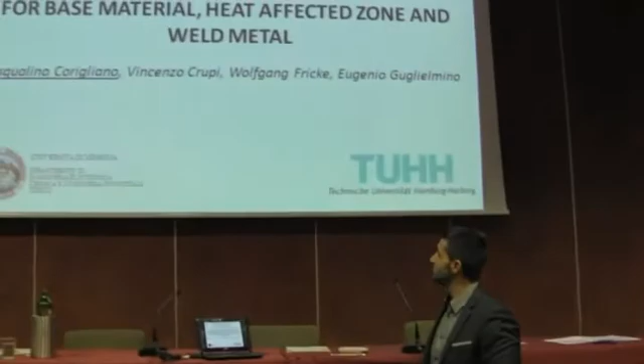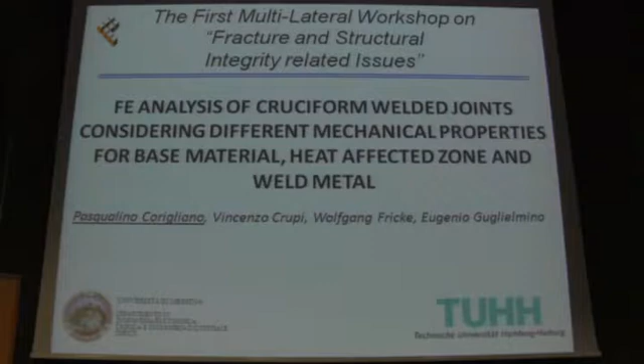The work I'm going to present today deals with the finite element analysis of cruciform welded joints, made by considering different mechanical properties of the base material, heat affected zone, and weld metal.

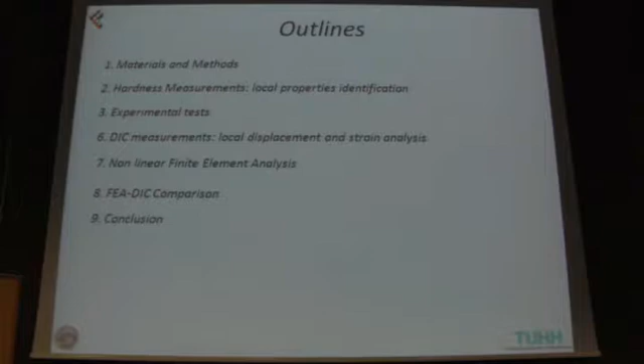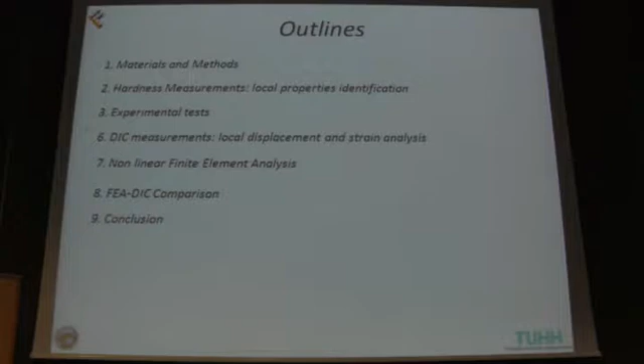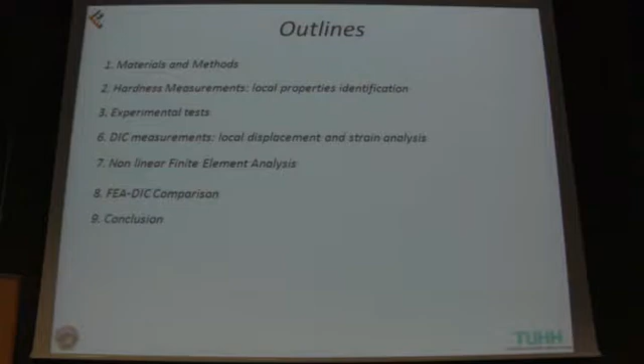The outline of the work is as follows. First, materials and methods. Then hardness measurements performed to identify the local properties related to stress-strain curves for the different material zones. Then the experimental tests using the DIC technique to detect local strain and displacements. Then a nonlinear finite element analysis, compared to the experimental test, and at the end the conclusions.

The material used is a mild steel, widely used in the naval field, and the welding technique was a full penetration welding using the MAG process. In these figures we see the real welded joint and the nominal geometry of the welded joint used for the experimental test.

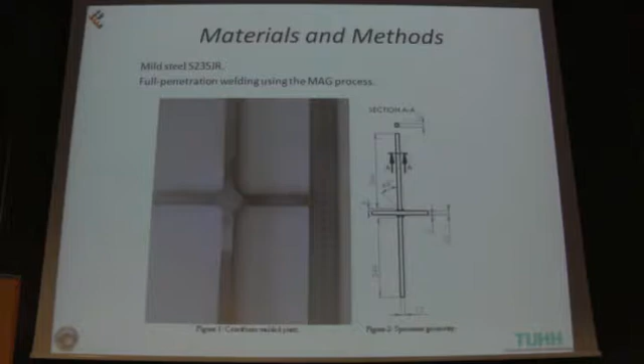The hardness measurements were performed with an innovative method called the UCI method, based on the natural resonant frequency of a bar, which is excited and pushes the Vickers diamond into the sample. This frequency changes, and these changes are related to the hardness values of the sample.

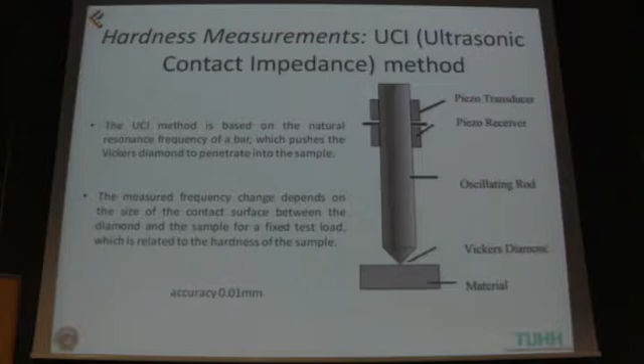The accuracy of the instrumentation is about 0.01 millimeter, and we are able to have a whole map of the hardness measurements. Here we see the test.

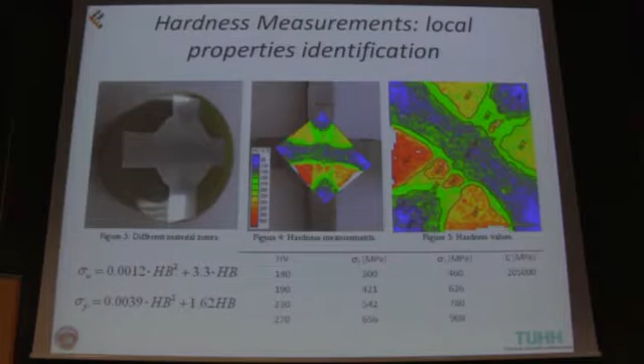Using these groups, we related the hardness values to the ultimate and yielding stress of the material. These two equations were taken from literature, from a recent paper of Lopez and Fatemi. Using these equations, we defined the different material characteristics that we are going to use.

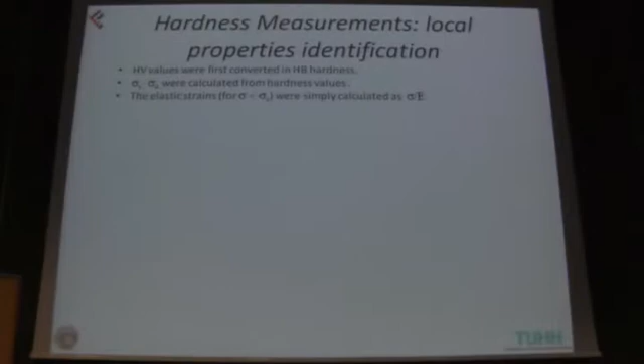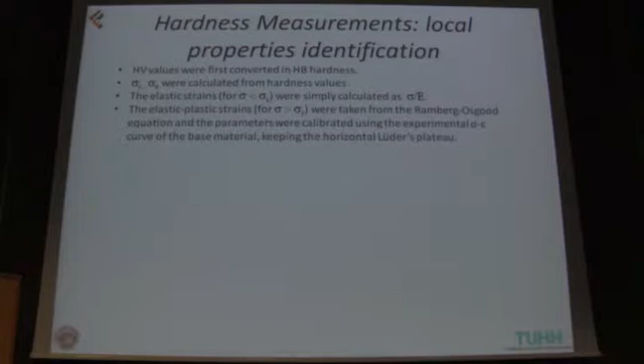Resuming: first we define the different groups of hardness values. Then HV values were converted, and the stress-strain curve was evaluated. The elastic strain was calculated as the sigma over E ratio, while the plastic part was calculated using the Ramberg-Osgood equation. The Luder's plateau band was also kept, and the base material curve was validated with the hardness measurements.

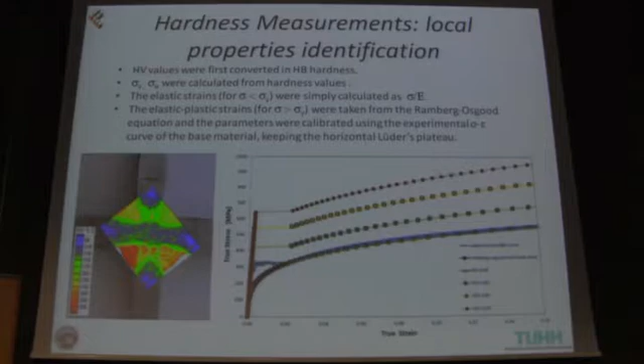In this figure we see the input parameters; this test is a displacement control test, and this is the force revealed by the load cell from the machine. Here we see the deformed specimen at the minimum load.

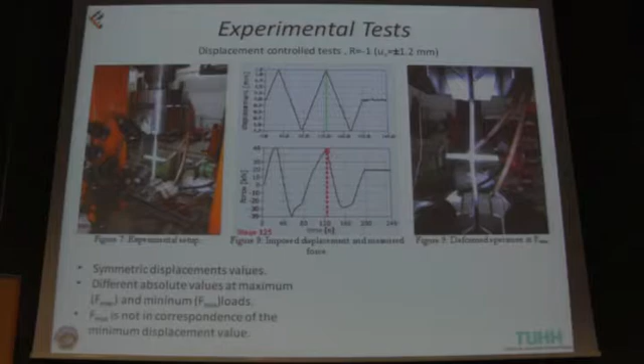It's possible to observe that symmetric displacement values arise, but at the same time we observe different values of maximum and minimum load. Moreover, the minimum load is not in correspondence of the minimum displacement. This means the specimen deforms in a way that bending arises, causing a diminution of the load.

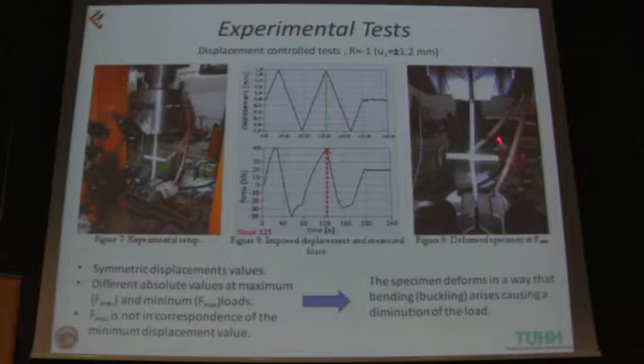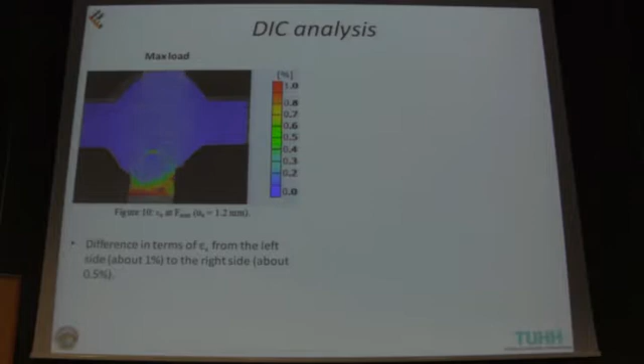It's also possible to see from these figures at the minimum load. The DIC analysis performed analyzed max load and min load. At the maximum load it was observed that there is a difference in terms of strain along the X direction, the vertical direction, from one side to another.

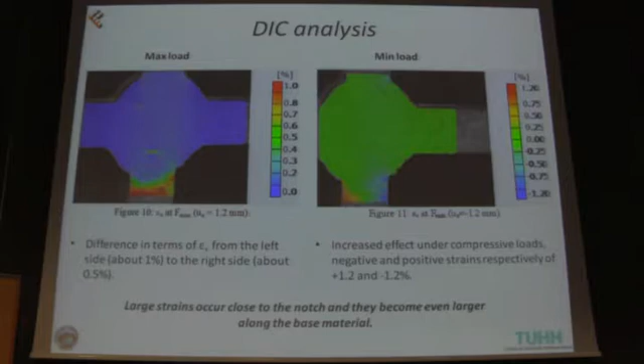At the minimum load this effect is even increased. We can see that negative and positive strains are present. Also, during these measurements it was observed that large strain occurs close to the notch, but they become even larger along the base material.

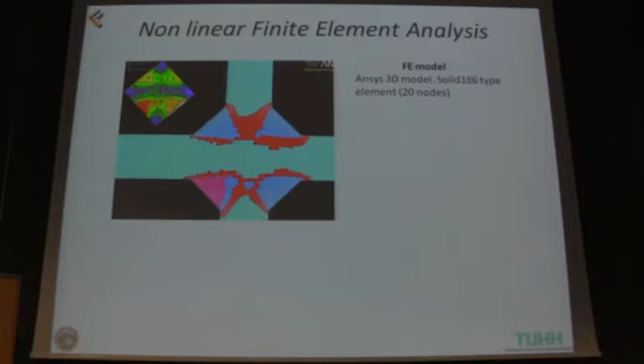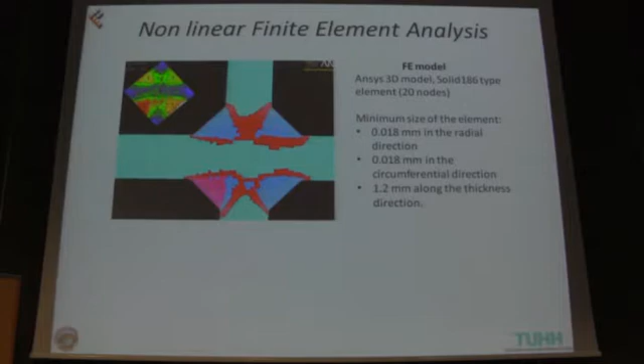After this test, we performed a nonlinear finite element analysis using ANSYS software, developing a 3D model which uses the solid 186 type element with 20 nodes. This is the minimum size of the element at the notch of the specimen. The nominal notch radius is 1.2 millimeter.

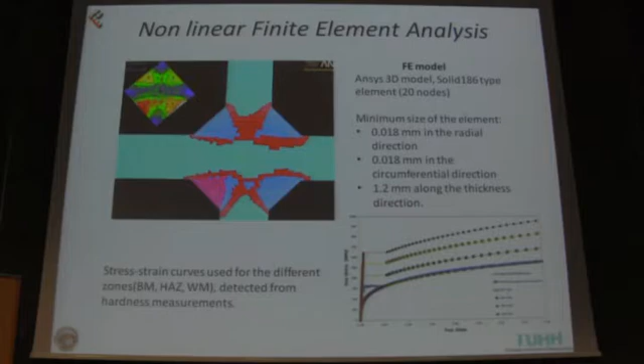The stress-strain curves used were the ones defined before from the hardness measurements discussed previously. A preliminary analysis was performed.

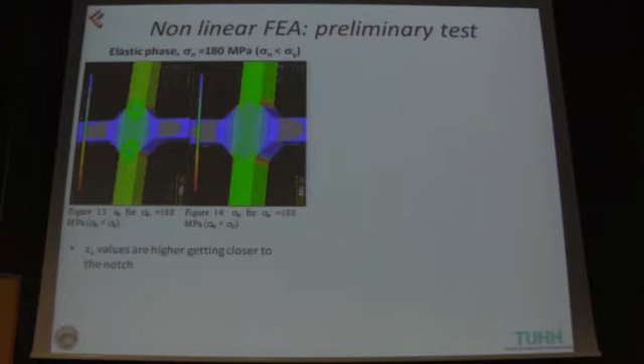First, in the elastic phase, it was observed that the strain in the vertical direction is higher close to the notch. While in the elastic-plastic phase, for a nominal stress greater than the yielding stress, the strain in the X direction evaluated at the notch is higher than in the elastic phase, but it's smaller near the notch with respect to the base material.

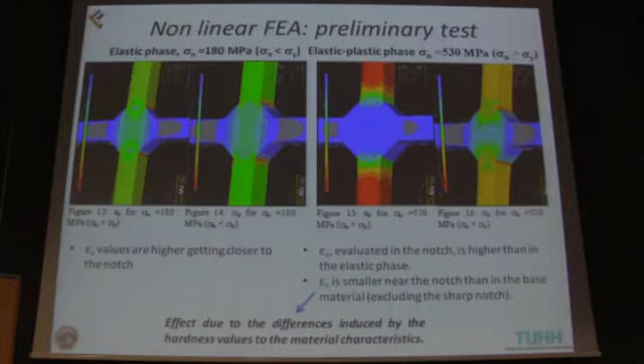This effect is due to the differences induced by the hardness values on the material characteristics, because as we saw before, the welds are much harder than the base material.

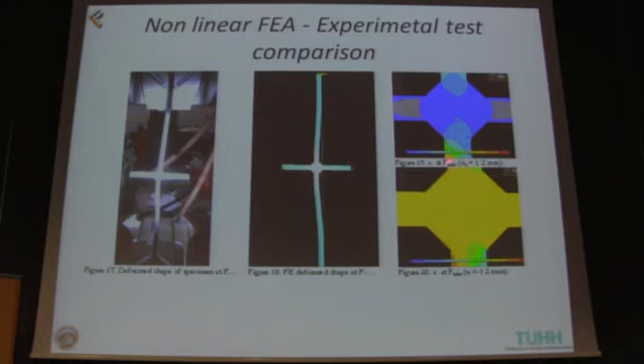A comparison between the two techniques was made. Here we see the deformed shape of the specimen from the experimental test, and here we see the deformed shape of the finite element model. The finite element model also captures the bending strain for F max and F min.

The strains from the DIC measurements are larger along the base material than in the weld metal. This means the behavior is well represented, but the values in terms of strain along the X direction still differ from the experimental data. This is probably due to the residual stresses.

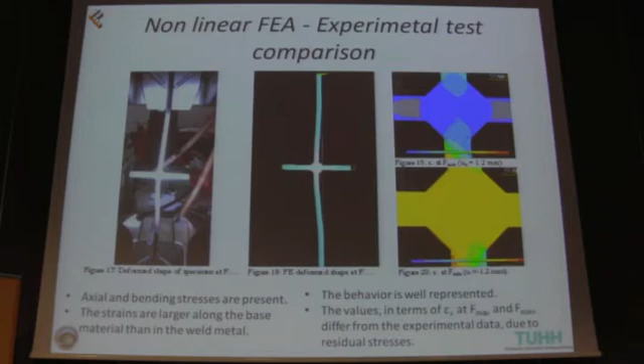For this reason, another comparison was made, in order to avoid the residual stresses, comparing F max and F min.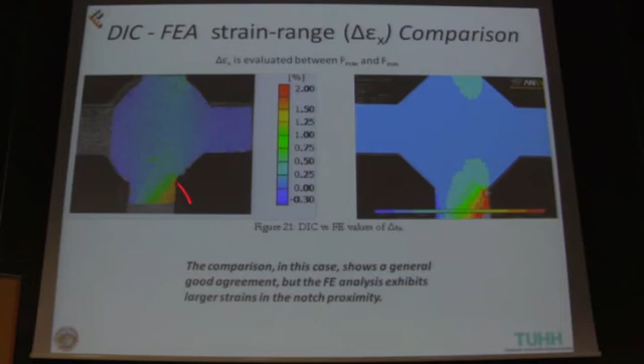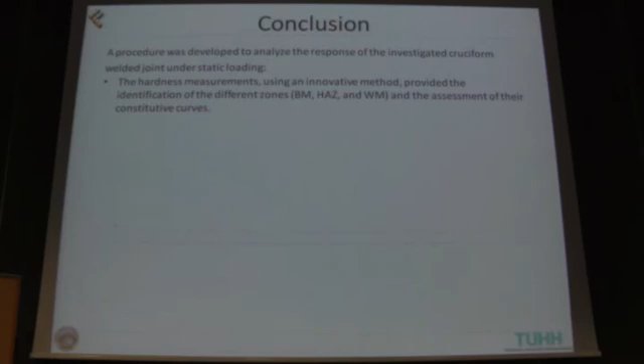We can conclude that we were able to develop a procedure to investigate the cruciform welded joint. We were able to define different material zones from the hardness measurements using this innovative technique, and we performed a nonlinear finite element analysis considering these different mechanical properties.

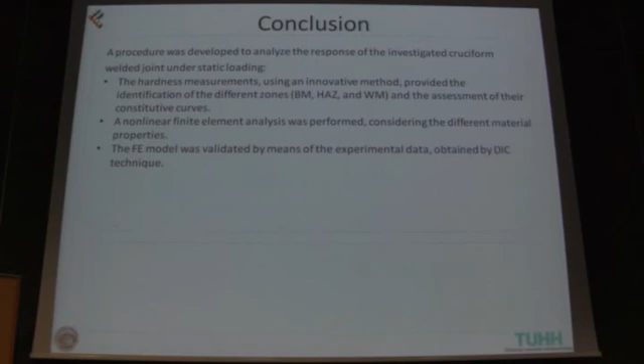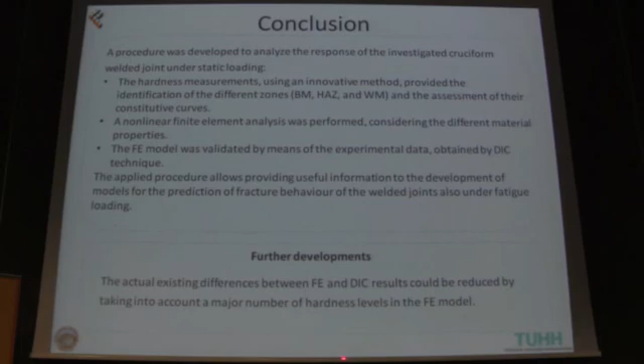The finite element model was validated by means of the experimental test performed with the DIC measurements. There are still some differences, so the model needs to be improved, and these differences could be reduced by taking into account a larger number of hardness levels in the finite element model. Thank you.